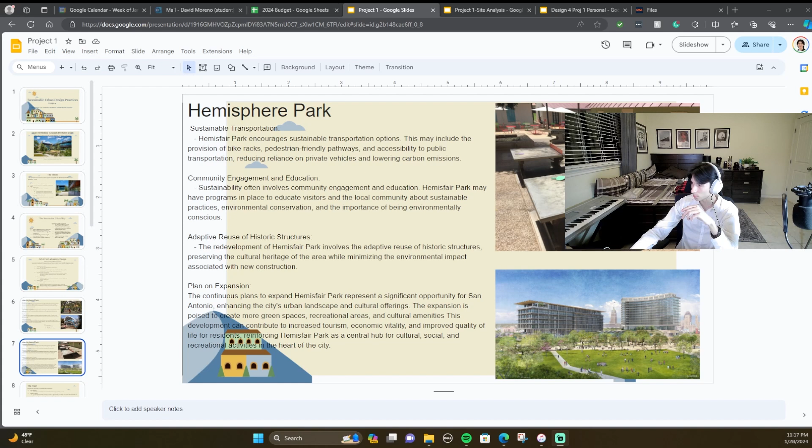So here we could see all the people in the group, shout out to them. With me, I did the Hemisfair Park. The Hemisfair Park is one of my favorite areas in all of San Antonio, and I just really like the structures being used here, and the green spaces and landscaping and the water conservation. I think all of it is really smart, and the thing I like about it is that it's going to be expanded in a couple of years to where it's going to look something like this. Hopefully, oh, my screen can't see it. Where it's going to hopefully look something like this, which is going to be pretty exciting. And I'm pretty hyped for it.

And so something else the professor wanted us to do was go out to a random, open area in the city, and whichever of the three groups had the best site is where the project is going to be done.

So we went to this site, which is this big open area, really cool space. It's right next to a river and dam. I'll show a little bit of pictures that I took when I was there, and luckily, it was chosen as the site.

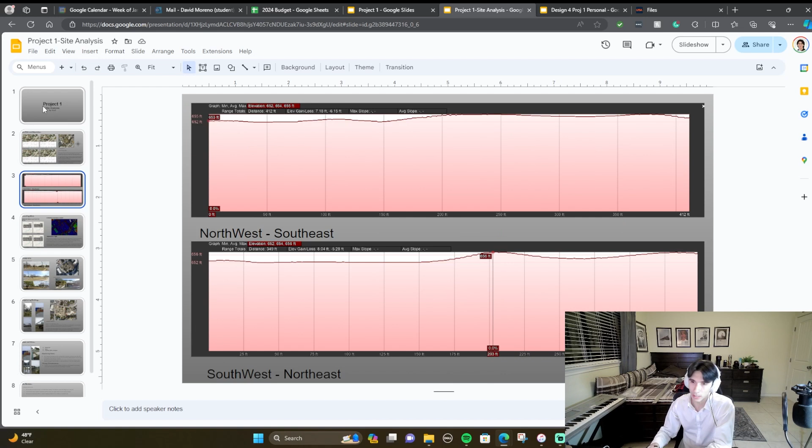I think it's good. This is great for anybody who wants to go into architecture, because it's the stuff you're going to have to do. You're going to have to figure out the sun path, elevations, prevailing winds, microclimates, and the topography of an area.

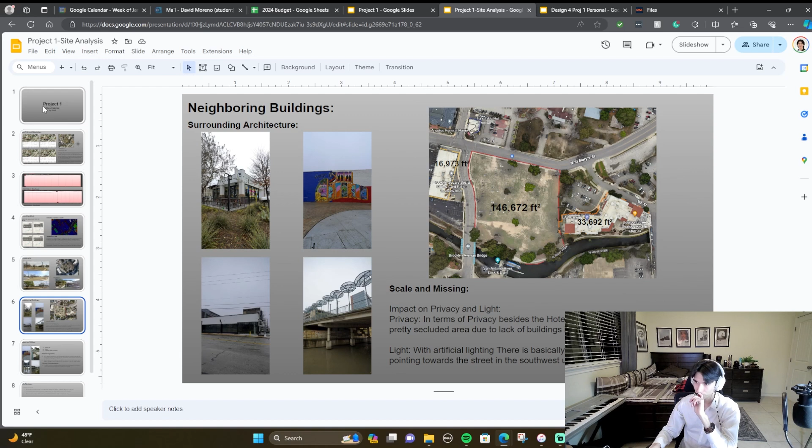Obviously, neighboring buildings are very important, and maximizing the views, sites and services around the area, all that cool stuff. So that's basically the main stuff we've been working on this past 2 weeks.

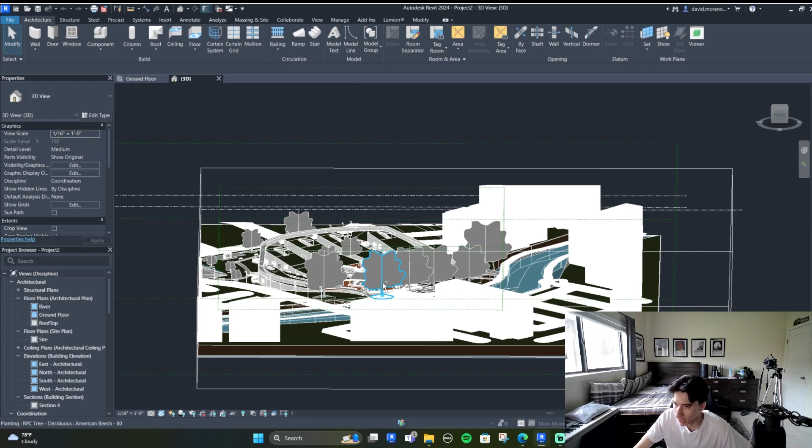Okay, so next, talking about Revit. My building's pretty much being covered, you can't really tell. Again, I really only had like a week to work on this. Really only had like a week. And it turned out insane. Turned out super good.

Here I'll show you at a ground floor level what it looks like. I was able to get this super detailed, and really just customize it the way that I wanted to.

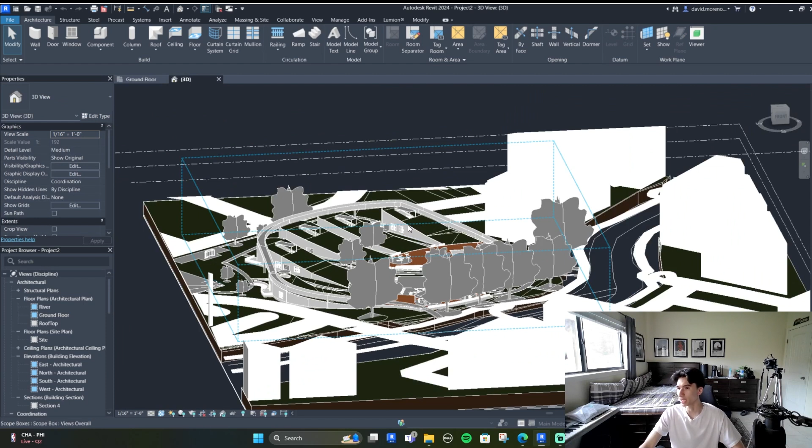A lot of work went into it, and I'm going to be explaining later, because I'm going to be showing the actual presentation of each purpose of each building, and what's happening over here, the connection to the river, everything like that. There's just so much into it that this video would be 30 minutes long if I tried to explain everything.

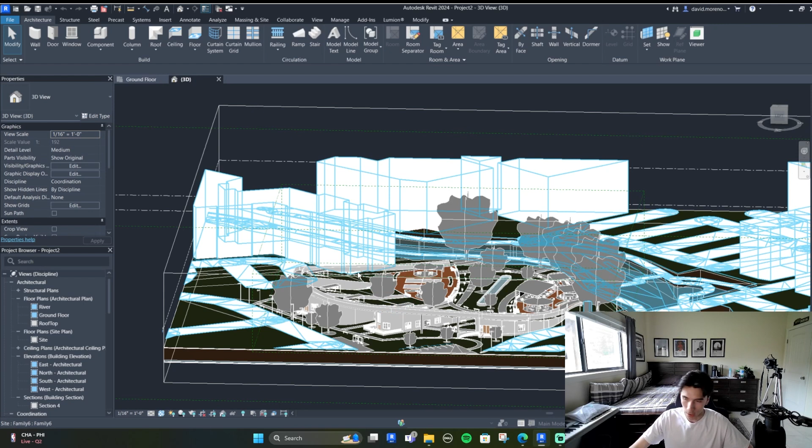But the process of this was crazy. It was insane, but a lot of fun. Had fun with it. Came out really good.

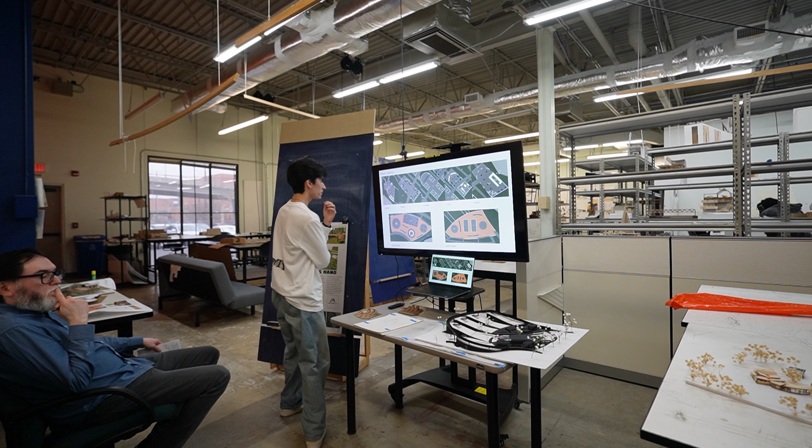And then with the index finger, it's a vendor space for vendors to go in and out throughout the month. Maybe they're selling clothing one month, maybe jewelry another month, various different things, and I wanted local people to occupy this building.

For the middle finger, it's a gallery, and I wanted to incorporate the idea of local artists once again, since I got my inspiration from a local artist. So basically playing with the idea that local artists would come here and sell their art that you could buy, if you've ever been to First Friday at...

Yeah, Blue Star. On the first Friday of every month, they have a similar process like this where they have an art gallery where local artists come by and sell their local art. It's very interesting—I went there for the first time during the month of January, and I just thought it was incredibly interesting. I never saw anything like that.

And the ring finger is this kitchen.

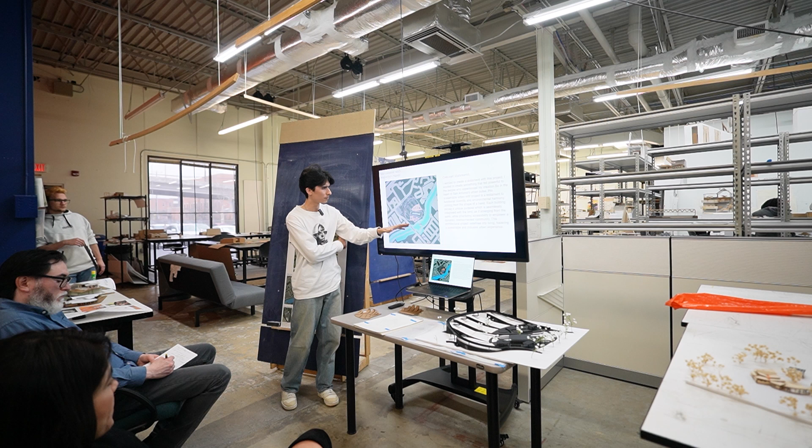Going to the site plan a little bit, which I'll probably go back and forth to. So this is St. Mary's Street, Brooklyn Avenue. There's a taco place right here, a hotel over here, and a couple of businesses. And of course, I don't want to take away local businesses, so this would most likely be something else besides a Mexican restaurant.

And the pinky is a cafe. We have these decks that are kind of meant to represent the palm of the hand. Now I'll get into that a little bit more.

The south deck is more for leisure, more for relaxing, so I created this viewing area where there's a big screen TV, and in the render, there's this projector that would go out and play movies, kind of similar to if you go to the Pearl on a Tuesday night, they'll be playing a movie there. I think during December I went there and they were playing the Grinch. So just stuff like that.

And then we have some seating areas, a bar area. And with this north deck, it's more for activity.

We have a kids play area with water fountains, very similar to how the Pearl is. If you've ever been to the Pearl during the spring or summer, they have those water fountains for kids to play.

Pickleball courts - if you don't know pickleball, it's a pretty big growing sport, a little bit like tennis for those who haven't played. But there's only, I think, one place in all of San Antonio to play pickleball, so I thought adding a central area downtown to do that would be a fun experience. And then we have some ping pong tables there.